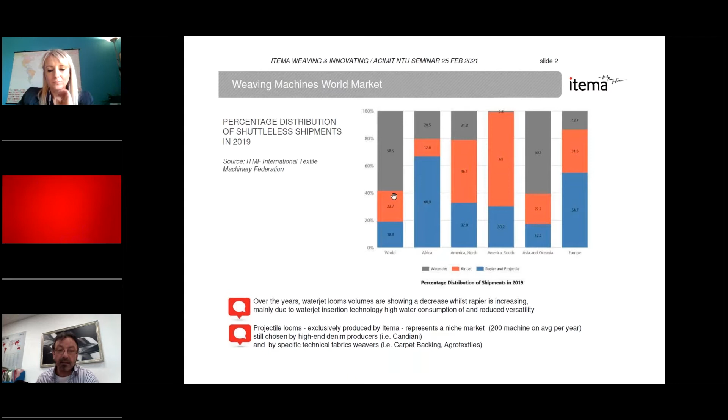Before going on, just let me give a short presentation of my company. Itema is a leading global provider of advanced weaving solutions, including weaving machines, of course, spare parts and integrated services. It was born from the merger and acquisition over the years of very important brands in the textile machinery industry, such as Sulzer Textil, Somet, Vamatex, and in the last year also Panter.

Itema has its global headquarters in northern Italy, Bergamo area, near the international airport. We have more than 900 employees worldwide and 2 production sites in Italy, 1 in Switzerland and 1 assembling line in China. Itema also has a worldwide presence with commercial, after-sales and training centers in Italy, Switzerland, China, India, Japan, USA, Hong Kong, and Dubai.

Okay, let's start. Our portfolio is rich because we are the only manufacturer in the world to provide the top 3 weft insertion technologies: rapier with both negative and positive transfer, airjet and projectile.

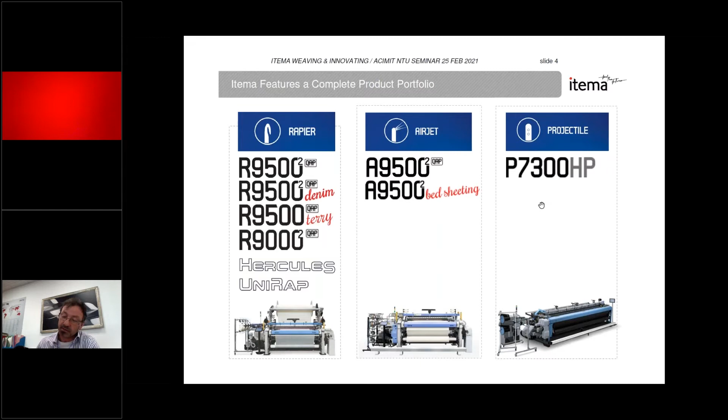Airjet weaving technology. With the airjet looms, it is possible to reach today speed performances that were unthinkable even only 6-7 years ago. We have customers who nowadays are able, with the new A9500 second generation air-jet loom, with cotton fabrics for clothing and apparel, to run at speeds of 1,280 and 1,320 picks per minute, 8,000 working hours per year. With fabrics made from synthetic yarns, such as linings, these speeds are even higher.

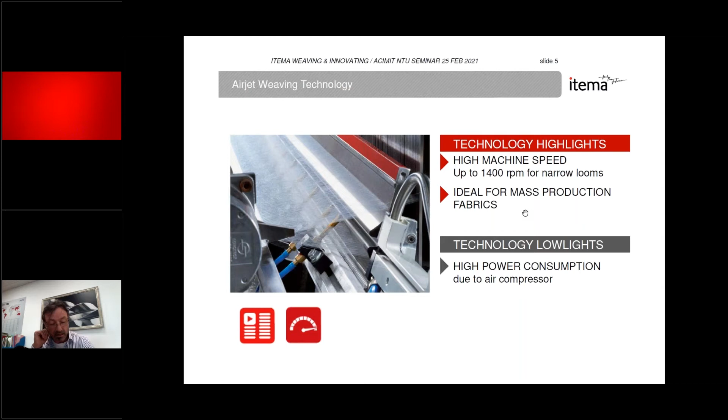The air-jet weaving machine is confirmed more and more competitive and winning, especially for the sectors of simple fabrics and mass production. Here we can see the segments where, in fact, the sector of gray fabrics, such as fabrics for background printing, apparel, bed sheeting, records the greatest preference for the air-jet. Next comes the denim sector and synthetic and shirting.

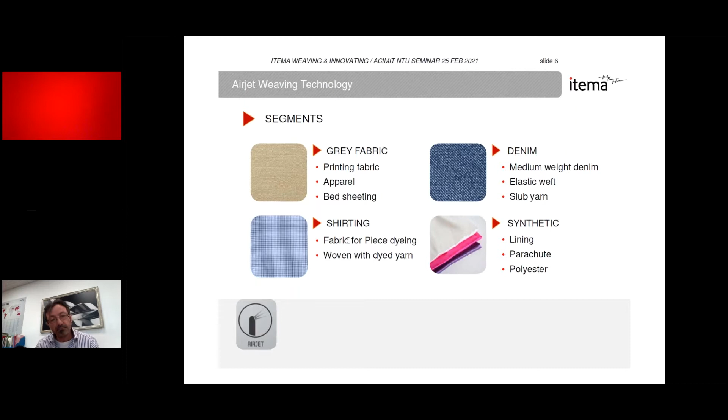Rapier weaving technology. Rapier looms are the most versatile looms ever. Virtually all orthogonal fabrics on the market can be woven with rapier technology. Thanks to sophisticated research on materials and innovations that we will explain in the next slides, our rapier looms have achieved truly remarkable performances, with customized solutions so as to satisfy any need of the weavers. But compared to the air-jet looms, due to the mechanics of the weft insertion system, rapier looms have a slightly higher spare part cost.

The segments are very, very large. Practically, as I said, there are no limits of orthogonal fabrics to be produced by rapier weaving technology, by the rapier looms.

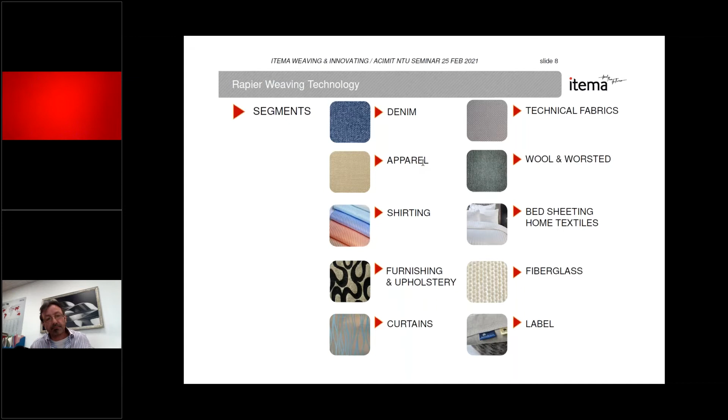The future of textile. The market of woven textile is getting more and more competitive. So listening to our customers, the three main points to focus on for the future of the weaving machine are, first, versatility. The weaving machine should be ready to weave different styles of fabrics, with the possibility to weave the widest range of weft yarns with a reduced machine setup time.

So versatility first. Second, digitalization and performance. Predictive maintenance, for instance, and big data collection are key points to provide the weavers with smart solutions able to guarantee cost savings and reduce the workload. Third, sustainability. To increase competitiveness, the weaving machines need to provide reduced consumption, both in terms of energy and fabric waste.

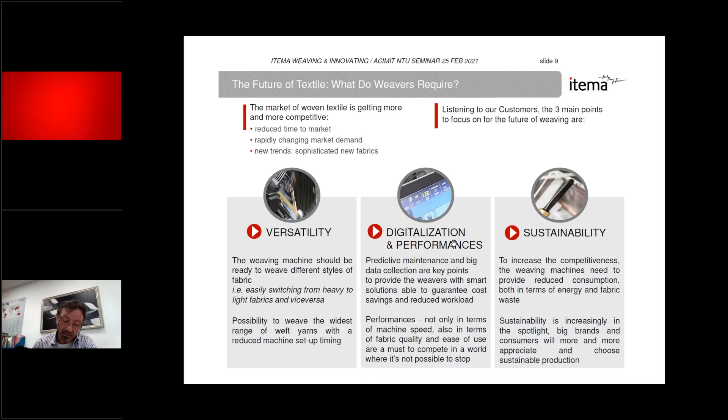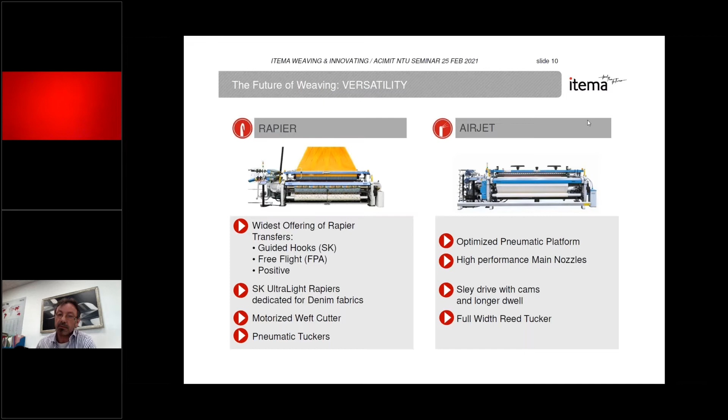So, versatility. Versatility for rapier looms means a wide range of weft insertion systems. For instance, with guide hooks, we call SK, with guide grippers, without guide hooks inside the shed. With guide hooks is to allow the highest weaving speed.

Specifically for the denim sector, we developed an ultralight version that, in addition to the very high weaving speed, allows the weaver to also set a very small shed angle, like no other reference. The shed angle is a very, very important condition for the quality of the weaving. With free flight rapiers, sorry.

Scusi, signor Ranza, scusi. I kindly ask all participants to mute the microphone, please. Thank you. Mute the microphone, please. Prego, signor Ranza. Okay.

So with the free flight rapiers, FPA, free flight rapiers, they are suggested in case of very delicate warp yarns, even filament zero twist, which cannot withstand the presence of guide hooks inside the shed. Then we also have positive rapiers, in order to really weave any type of weft yarn.

Then we also have a motorized weft cutter to better optimize the clamping and insertion efficiency of the weft, and also pneumatic tuckers with great ease of use and settings, a very user-friendly tucking system, significantly lower maintenance cost, and no problems of interference with the warp as the mechanical tucker system has.

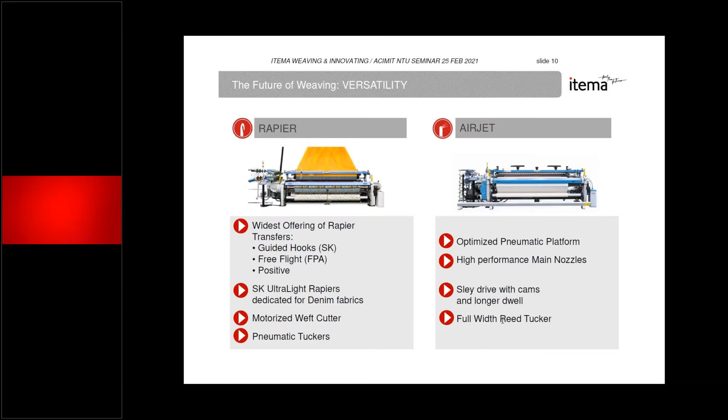For the Airjet, we have an optimized pneumatic platform. We will see later. Optimized pneumatic platform, high performance main nozzle, sley drive with cams, with longer dwell, and full width reed tuckers. Let's go deeper inside the Airjet. So the pneumatic platform is the base for the weft insertion on an Airjet machine.

The pneumatic platform must guarantee very high speed, respond very quickly, and above all, without large fluctuations in air pressure. For this reason, larger tanks have been designed in order to have maximum system responsiveness and stability. Furthermore, the tanks are positioned in special cavities here, to reduce as much as possible the vibration. Tanks.

So, as I told, the main tanks are inside the main frame of the loom in order to reduce vibrations as much as possible. And thanks to this, the pneumatic platform appears compact and at the same time more robust. All this guarantees optimal weft insertion cycle control, which is, I repeat, the main feature to be able to weave at very high speed. Here we can see the volume that we have increased in comparison with the last model of Airjet looms that we had. We introduced the model at the last ITMA in Barcelona in 2019.

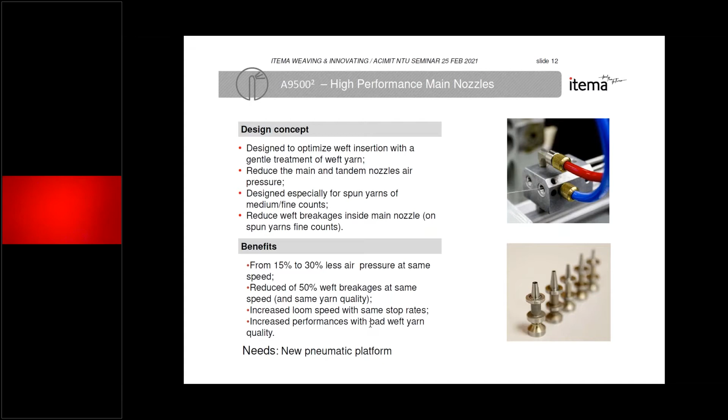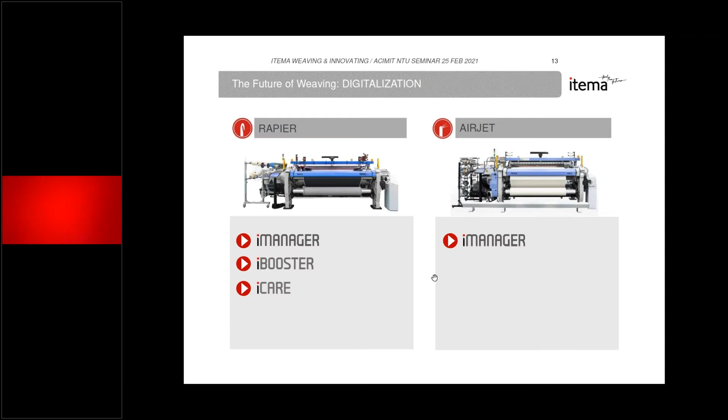So next, digitalization. For digitalization, we can offer at the moment electronic and digital solutions like iManager, iBooster, and iCare for rapier, and iManager for Airjet. iBooster. The iBooster package was introduced in the latest model of rapier loom, launched during the last ITMA in Barcelona.

iBooster is a package that literally boosts machine performance, thanks to a deep material study by our ITEMA lab in cooperation with Lamiflex. Lamiflex is a producer of composite materials like carbon composites and plastics. ITEMA developed new reinforced tapes, sprocket wheels, and micro smart coolers to ensure extended lifetime.

Part of iBooster is the iCare package. iCare monitors in real time the state of ITEMA tapes and sprocket wheels and suggests possible interventions. When it's time to replace these components, a pop-up menu appears on the machine console and helps a lot the technician of the weaver. It provides the advantage to fully control the machine operations, even when running at high speed. Maximum speed and maximum reliability at the same time.

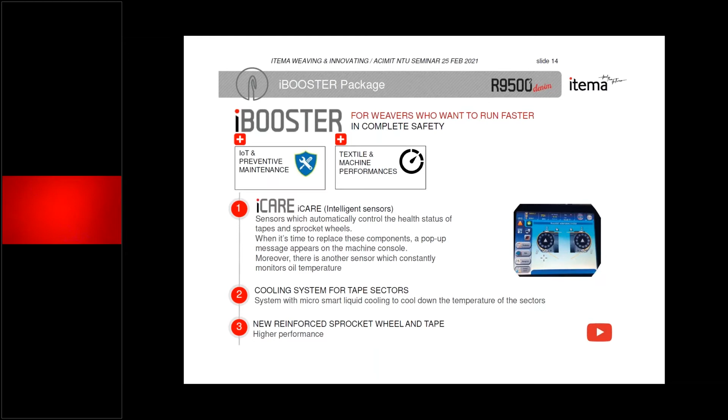Next, iManager. iManager is the ITEMA weaving managing system that brings on a laptop or desktop computer all the relevant data and information about the weaving machines. Thanks to iManager, it is possible to see in real time the actual status of the looms, the textile data, the settings, as well as to view and download machine statistics in several formats, giving also essential information about the operation of the weaving machines.

Moreover, by means of the textile CAD function, it is possible to open, create, modify, and save Dobby and color patterns, as well as to edit old file formats and to directly upload them on the loom. This is iManager for digitalization, an important tool for modern weaving.

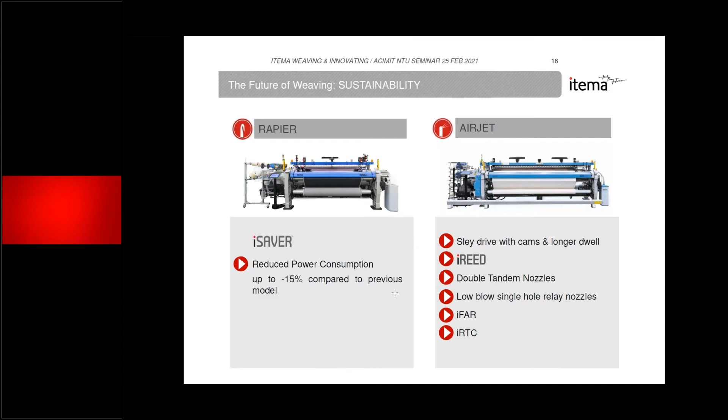Last but not least, sustainability. Nowadays, energy consumption is more and more important, not only for economic reasons, but also for ecological reasons as well. For Rapier, we introduced the iSaver, and for airjet, sley drive with cams, iReed, double tandem nozzle, low blow, single hole relay nozzle, iFAR, and iRTC. Let's see them more deeply. The iSaver.

Since ever, Rapier weaving implicates warp and weft waste formation at both fabric sides. iSaver is a new device that is able to completely eliminate the left-hand side waste selvage. Listen, left-hand side. So at the left-hand side, there is no waste at all. iSaver is based on the most advanced mechatronic principle, which provides weavers with an innovative, intuitive, and simple to operate device. Setup is directly from the machine console. It does not hinder the operating speed of the loom.

It is composed of a brushless motor for the horizontal movement of the clamps, these clamps, and a voice coil linear motor for the opening and the closing of the clamps that hold the weft. It is possible to have 4 clamps. It means 4 weft colors.

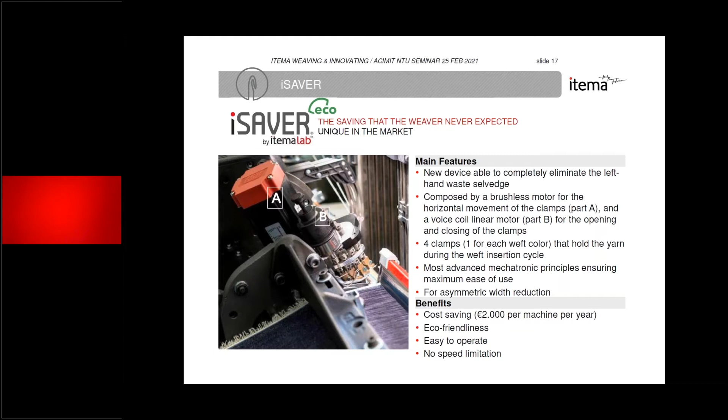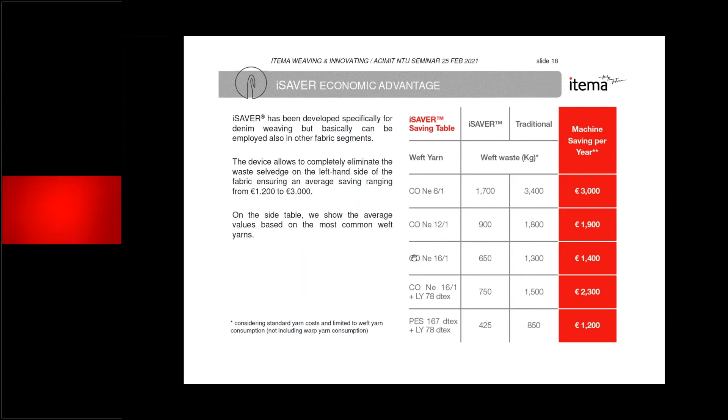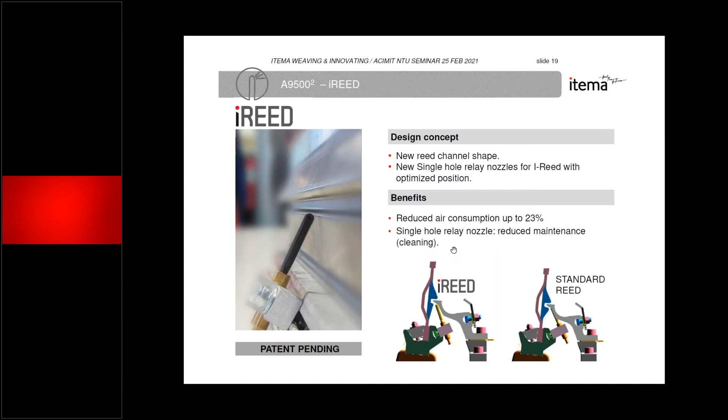Sustainability means also efficiency. A large percentage of the filling stops, so the weft stops, are handled by the machine itself. Air-jet can be not successful in weft insertion. It can happen that the weft does not reach the right-hand side of the loom correctly for various reasons. The weft does not break, but comes out of the reed tunnel. In these cases, the air-jet loom can restart automatically through the iFAR device, which eliminates and extracts the short weft from the shed. The weft extraction can be done pneumatically, and we call it FAR, or with the combined action of pneumatic and mechanical extraction, that we call iFAR.

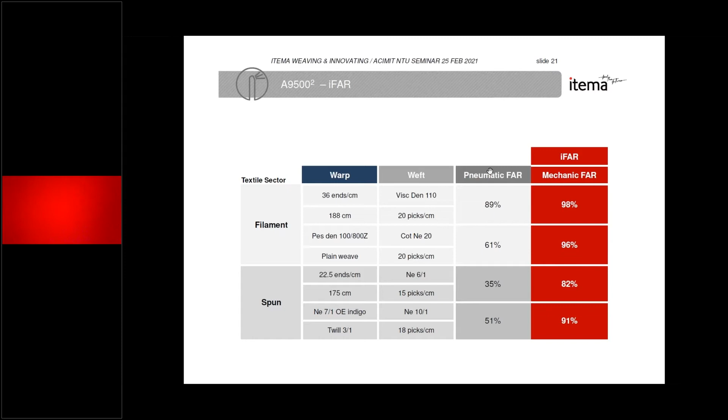In this diagram, you can see some comparison, because according to the sector and the type of fabric, we can suggest to use pneumatic FAR, that is simpler and cheaper, or the more complex iFAR system with mechanical and pneumatic action. For instance, for filament fabrics, we can suggest to go with the pneumatic FAR because the efficiency of extraction is very high. On the other hand, for spun fabrics, the heavier the fabric, the more is the necessity to have the mechanical system.

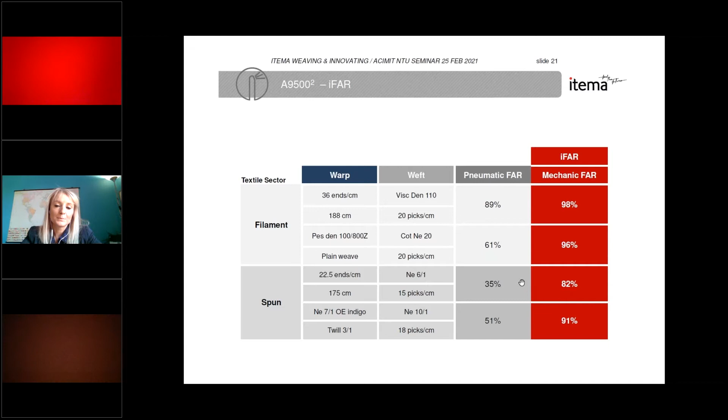One of the most important things that helps the efficiency in the air-jet loom is real-time control. As I said before, with the air-jet weaving machine, about 70% of total air consumption is consumed by the relay nozzles. The amount of air required depends on the opening time of the relay nozzles, and it is crucial to minimize the opening time of each relay nozzle valve.

With what? With this iRTC that helps to better follow the flight of the weft, and to reduce to a minimum the activation of that. So iRTC simplifies machine adjustments. For customers with little qualified personnel, it guarantees better performances and lower air consumption. We can say up to 20% less air consumption.

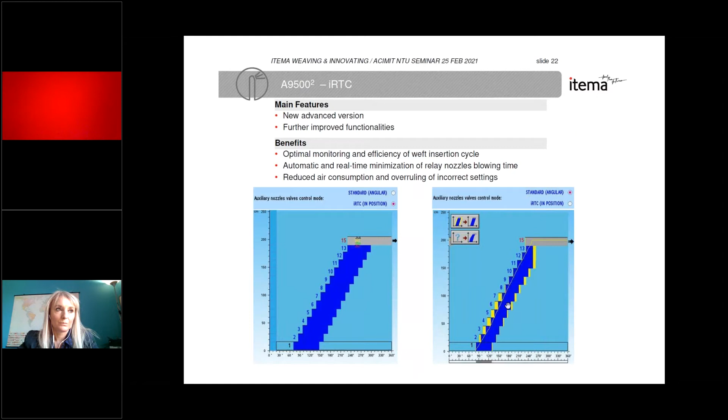For companies that have capable staff, anyway, it allows them to arrive in a shorter time at the optimum configuration, because it's completely automatic. Furthermore, iRTC will be able to benefit from better efficiency in weft insertion, because the system follows its flight better. This benefit is all the more evident the poorer the quality is.

The poorer the quality of the yarn, the longer the blow it needs in order to be able to follow every different type of flight. With the iRTC, no need. So we should have also better efficiency.

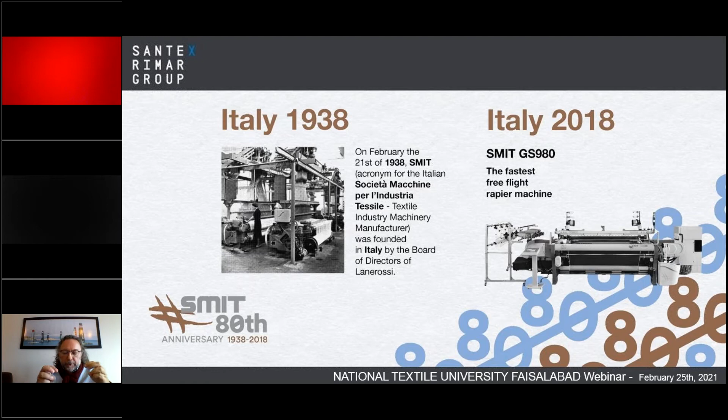It is 83 years old, and the group started in 1964 with Rimar, founded by Giannino Marzotto as a research and development department of the Marzotto Group. Today it is one of the leaders in Italy as a textile manufacturer. A heritage of six companies which have made the history of technology in textile and technical textile.

Here we have SMIT since 1938, the first rapier weaving machine in the world. You can see the long history of SMIT, changed over time, became Nuovo Pignone with the famous Fast, and then G6300, and then again the GS 900 series. The company joined Santex Rimar Group in 2016, and today it's part of this very good group.

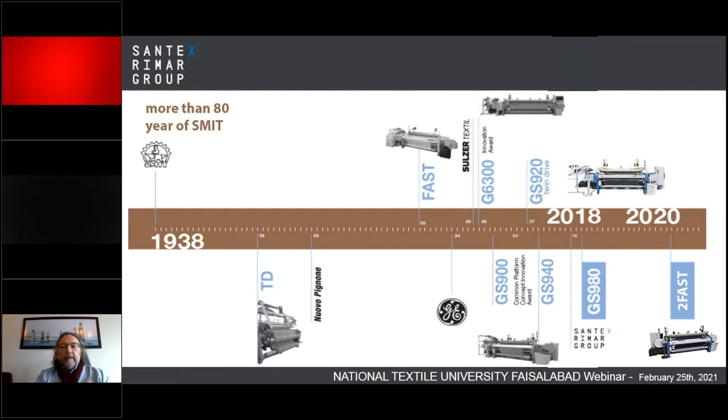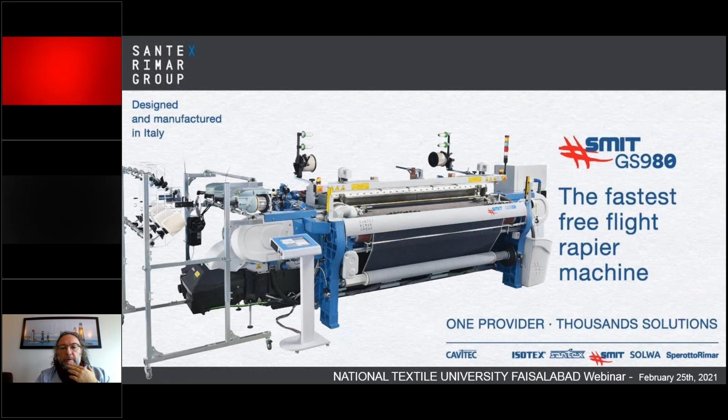This is one of the latest machines. We have the GS 980. 80 means 80 years of history of SMIT. It is our production in Italy, 100% Italian manufacturer, produced in Vicenza, and mostly used also in technical textile.

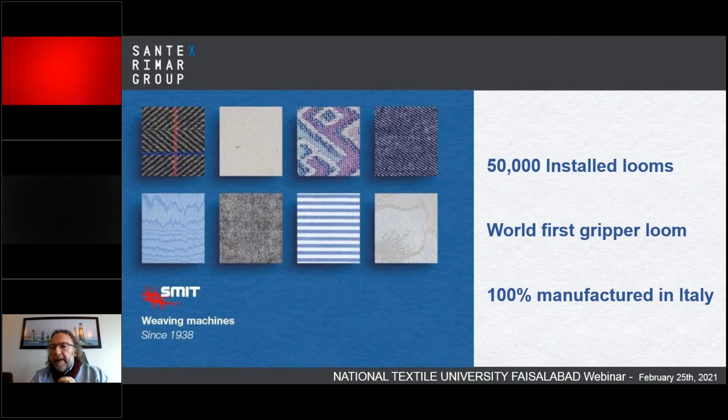Here we have 50,000 machines installed worldwide. It is the first gripper loom in the world, and as I told you, is 100% manufactured in Italy. Performance is very, very important. As you know, the speed is very high, considered as a free flight machine, and insertion up to 1,650 meters per minute with a speed of over 700.

Versatility, big versatility in terms of yarn count and type of yarn: cotton, spun yarn, polyester, carbon fiber, glass fiber. And one of the main characteristics of this machine is it's a free flight machine. It's totally free flight and it guarantees high quality in the final fabric.

The drive, we have a spherical crank driving mechanism. This guarantees a movement of the sley and the gripper that is very smooth, and this allows us to work with free flight in a wide loom, 380 is our maximum, with very high efficiency and high performance.

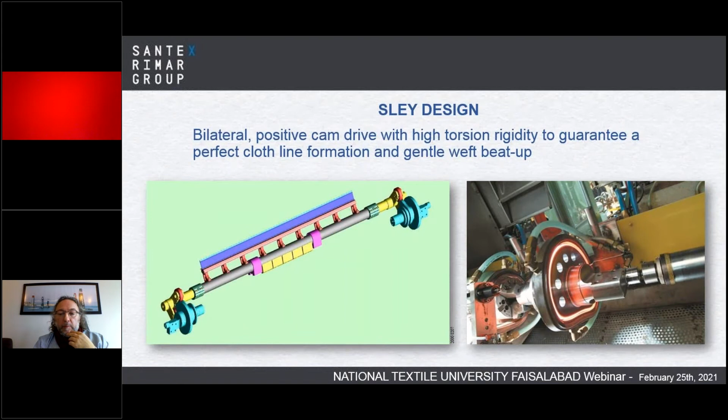Sley design, bilateral positive cam drive with high torsional rigidity to guarantee the perfect cloth line formation without any mark and defect on the fabric. Quality at the end of the fabric is very, very important.

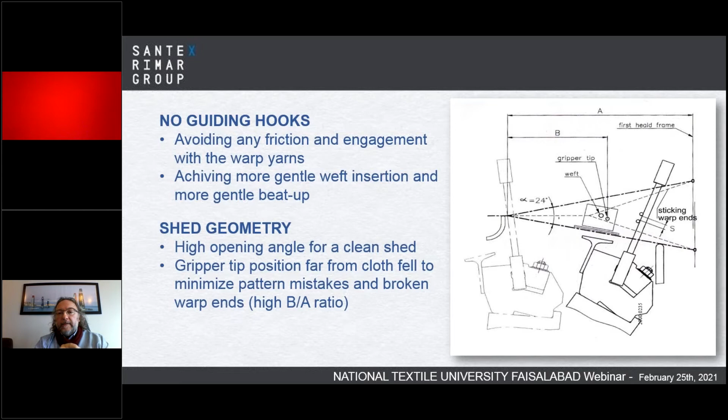As I told you, it is free flight, so it means there are no guiding hooks. This helps us to avoid any friction with the warp yarn, and this helps us to achieve more gentle weft insertion and more gentle beat up. High opening angle for a clean shed, so no friction of the gripper with the warp yarn, and this helps us to have practically a very low rate of broken warp ends and high quality of the fabric at the end.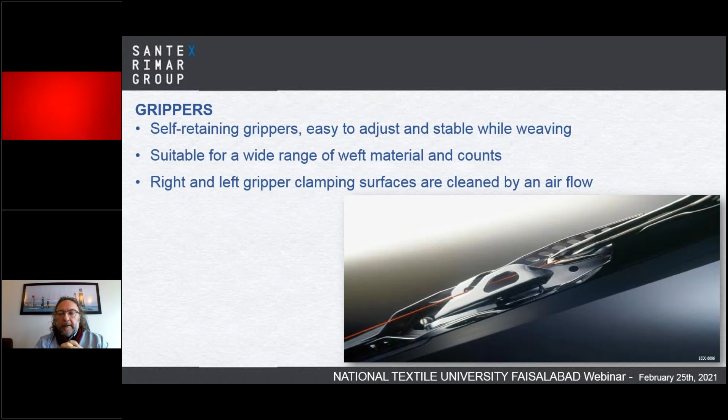Grippers are specially designed from Smit in order to work at very high speed in free flight. New direct drive allows practically to move the loom at any speed, any range of speed, just with the control from the console. So reach high performance with less vibration and noise.

High efficiency in transfer for the shed motion. Dobby control from our console. Energy saving. This is very, very important today. The attention for sustainability, for the control of the energy consumption is very, very important.

Last but not least is the high torque and no vibration, high acceleration, in order to guarantee, from the first beat of the weft insertion, the same torque, the same power, in order to avoid any start mark when we have a stop of the production.

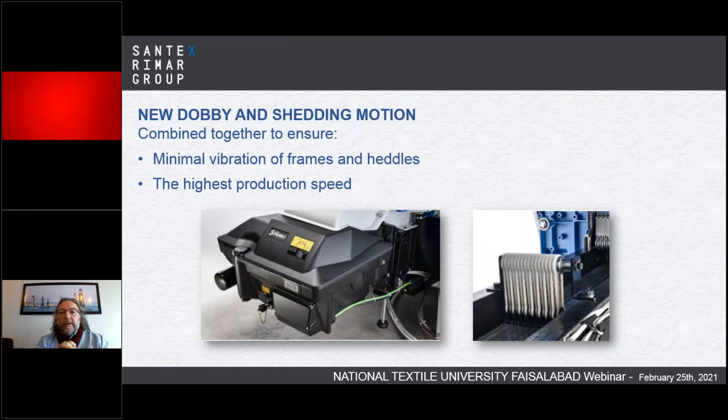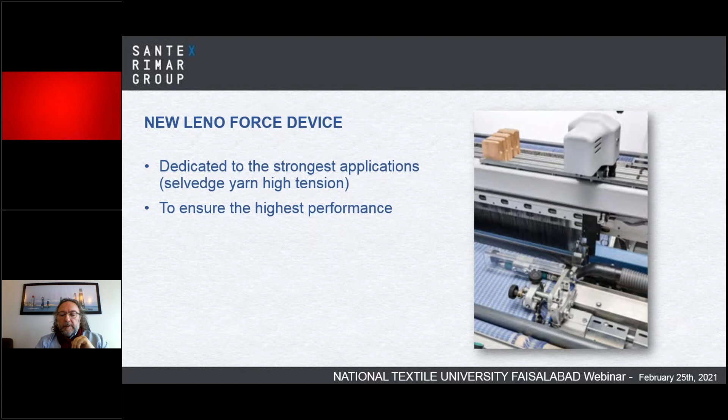New Dobby, we are using the main Dobby in the market, Stäubli. Stäubli is the leader today in Dobby production. We are using the version 3020 and 3060 according to the width and the speed of the machine. New Leno Force for the leno formation. We have the new system to control the high tension and high torque for the leno. We also have the tucking device in case.

New E-cut, this is very important in the case of using the wide range of weft, like my colleague and competitor, but friend Claudio was mentioning. The wide range of weft yarn used on the loom needs, in some cases, different timing of weft cutting, and in this case we are using our E-cut.

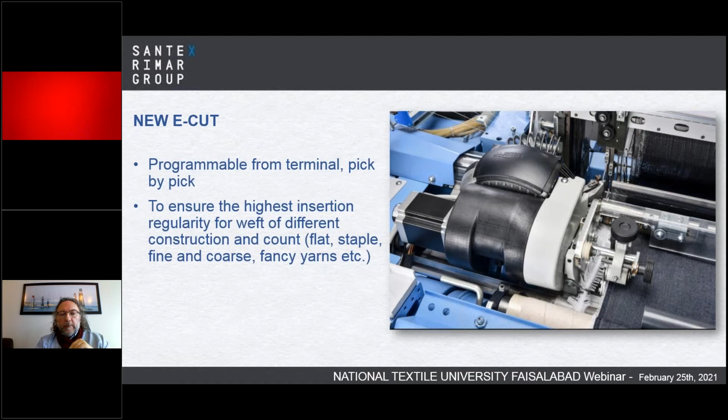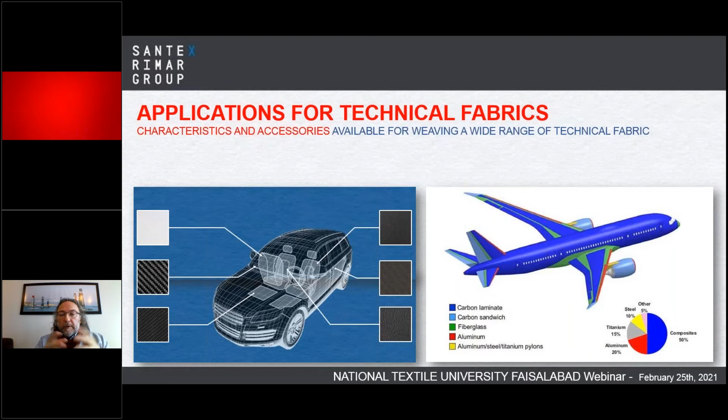Today, in the new 787, in the fuselage, in the wing skin, in wing flaps, vertical and horizontal stabilizer, a big quantity of composite material and aluminium is used, mostly produced practically on our looms, on weaving machinery.

So here we have indicated some of the most important parts we need to care about, especially when we are talking about technical solutions. As you see, for example, in airbag, it's important to have reinforced let-off unit, reinforced take-up unit, like warp deviation, according to the kind of technical fabric we go to produce.

We have different points, different items to care about and to improve in some cases in terms of rigidity, in terms of sturdiness and capability in order to reach high performance and a high level of quality of the final fabric.

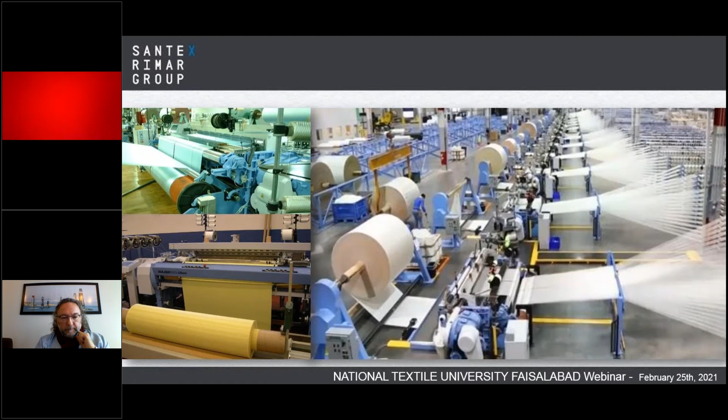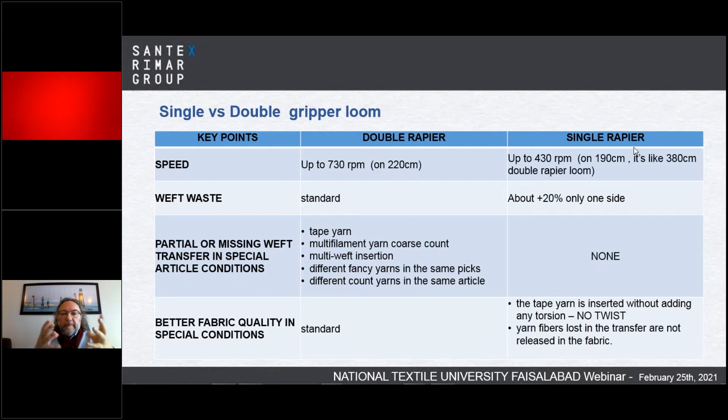Sorry, we go ahead because I cannot see this.

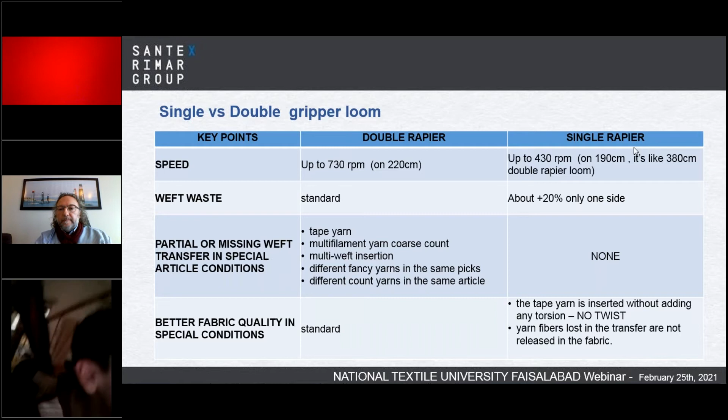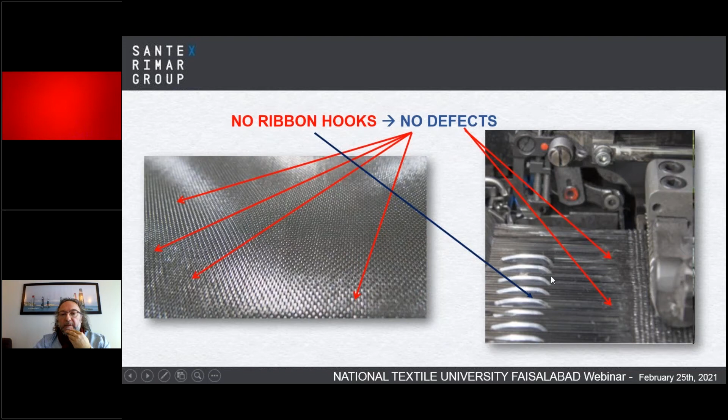No ribbon hooks, what I was saying before, is a free flight. Practically, in many cases, especially in a technical fabric, it's very important not to have any hooks because in case of hooks, we may have defects mainly in the warp, as you may see in this slide.

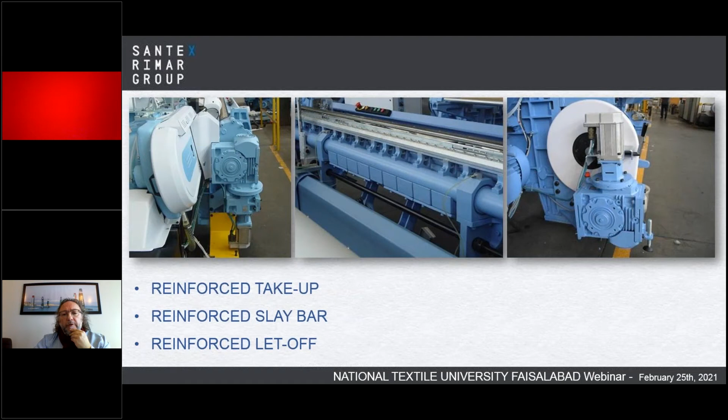Some details, as I mentioned before, in the slide before, are the reinforced take-up, as you see on the left, reinforced slay bar, and reinforced let-off. These are very, very important in case we are using, for example, glass fiber, carbon fiber, all those special versions necessary in a technical textile solution.

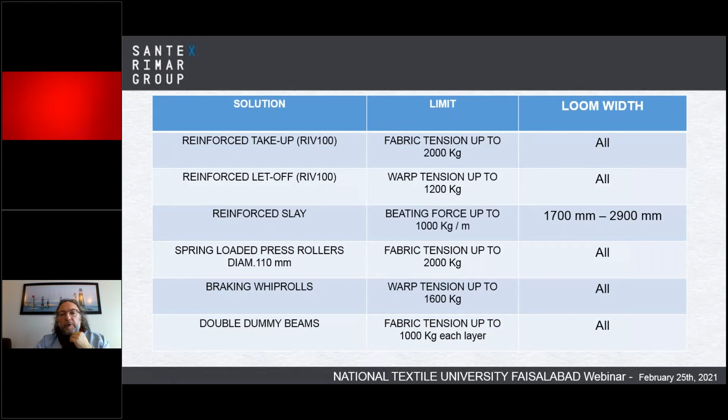So here you can see some characteristics. So reinforced take-up with a tension up to 2,000 kilograms, reinforced let-off, reinforced slay. These are all the characteristics we are using on our machine in order to reach high performance and high quality in production of technical fabric.

Here, press roller also; these are special components used on our machine in case of technical fabric. Of course, the take-up roller and the press roller need to be adapted to the different solutions and different needs of fabric production. In case we are producing again carbon fiber or glass fiber or steel, we may have different needs in terms of take-up and press roller.

Here we also have the back side of the machine, the same issue. I mean, the warp deviation roller and the braking whip roll can be single, double, dummy beam, and other different solutions which we have on our machine in order to produce practically any kind of technical fabric.

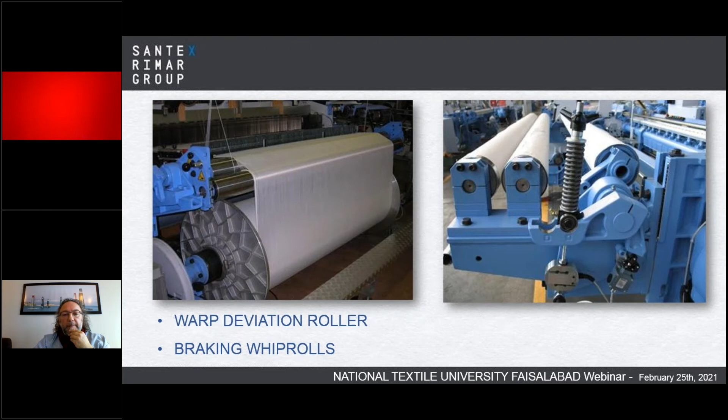Here we have exactly what I just mentioned, the dummy beam, single beam, single dummy beam, double dummy beam, or calendar in case of special processes for weaving, like double layer, etc. This we have mainly in fiberglass, for example.

Some solutions like airbag. So the importance of, as I said before, some items like reinforced let-off unit, reinforced take-up unit, deviation roller, full width temple, and optical sensor, false selvage warp stop motion. All these are very important in order to produce high quality fabric for airbag.

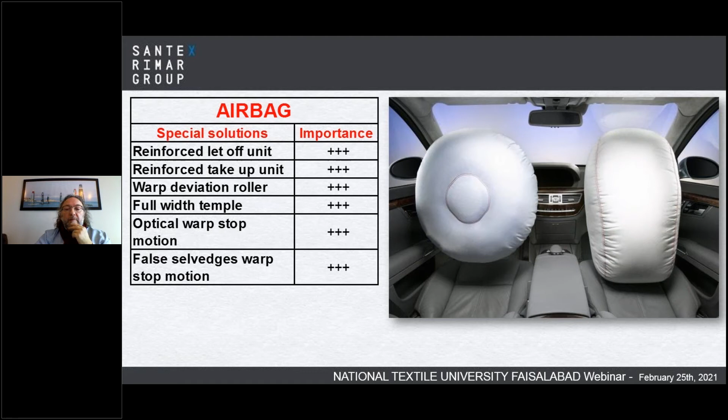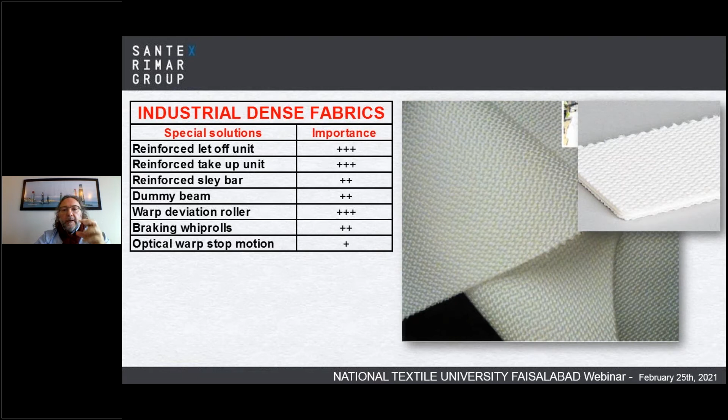Same issue for industrial fabric in very high density. So in each production there are some special or determined items which need to be particularly reinforced or built in according to the needs. Conveyor belt, for example.

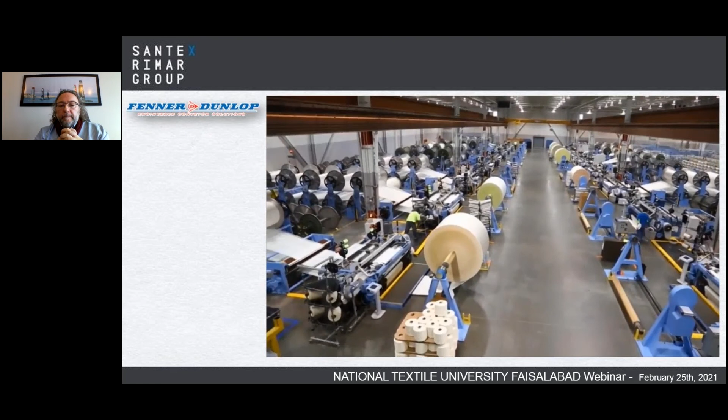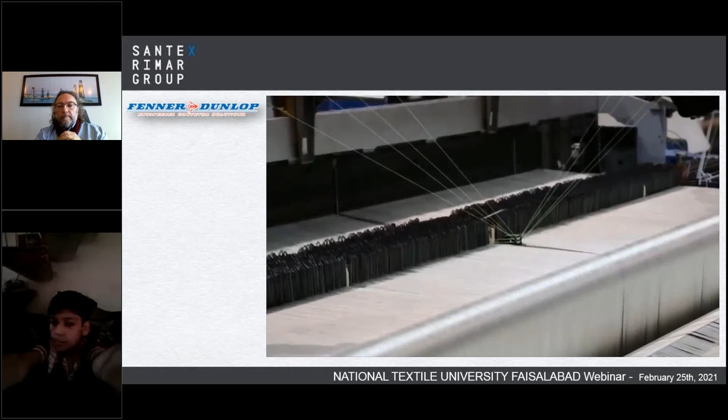Here is one of our customers in the United States, Fenner. Produces the highest quality belts available. Our belts are in operation in the most demanding conditions, supporting a vast range of industries. This is a beam fabric. That is normally our heavier weight fabric. Those fabrics are made to length for strength and modulus of the conveyor belt. Load support, impact resistance, and safety are all state-of-the-art modern facilities, a landmark of achievement in the industrial textile industry. With a combination of research, testing, and production, our efficient operation is a model of productivity while always focusing.

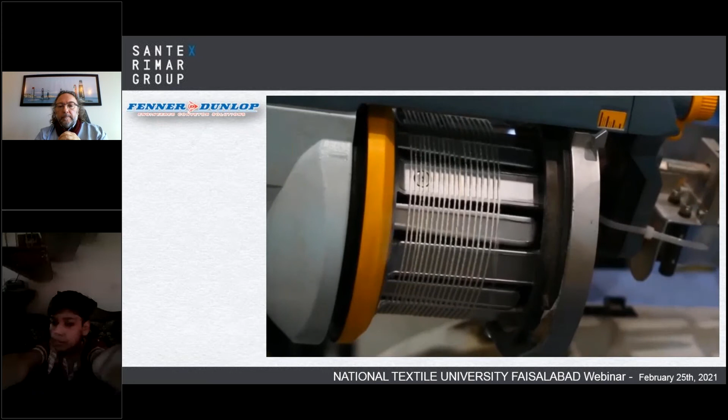Okay, what you saw was the video of our customer in the United States, Fenner, as you see, with a very big factory producing conveyor belts with fiberglass.

Here we have also, again, other products, coated fabric and tarpaulin. This process is also carried out by machine producers in our group, in the Santex team, like Cavitec and Santex, for finishing and coating, laminating, etc.

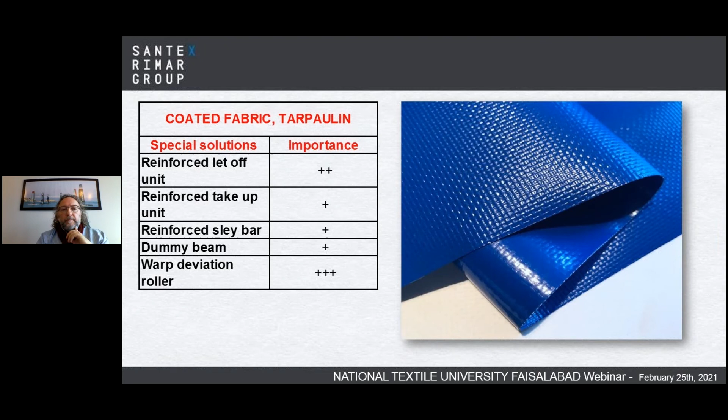As I said before, also steel wire fabric is possible to produce on our machine. Again, we have some items and some accessories which need to be specialized in order to reach a high quality product.

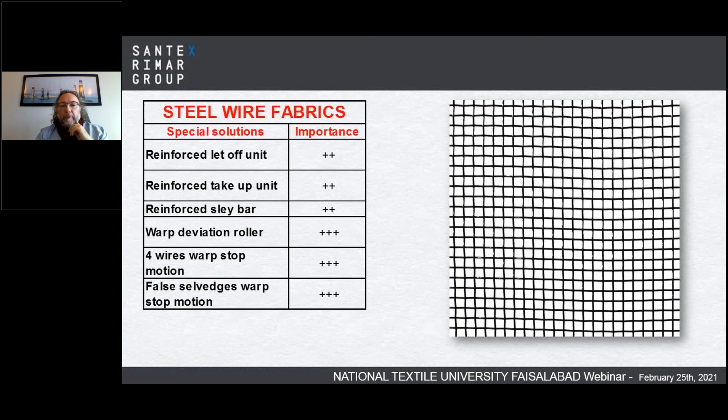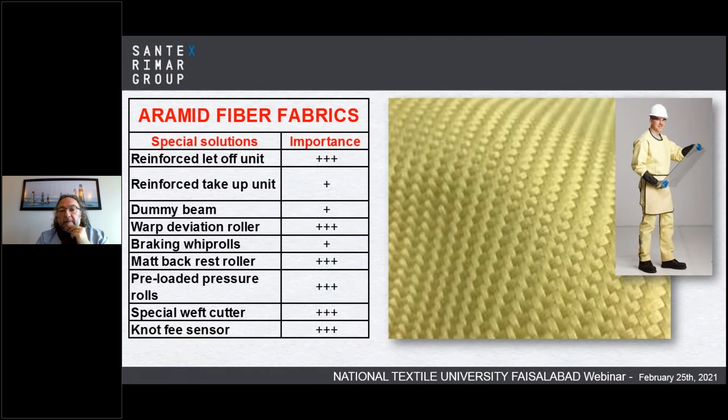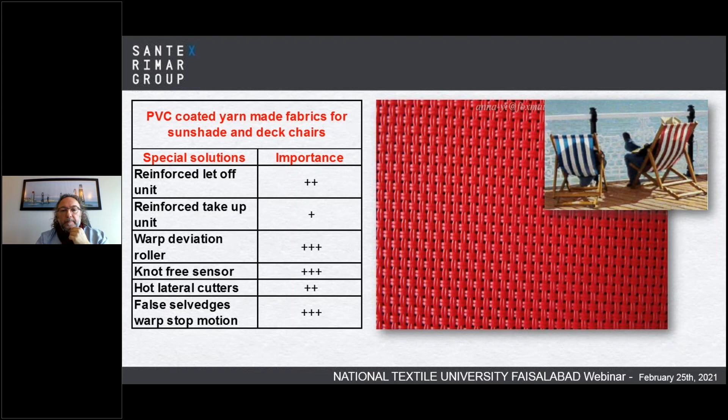Glass fiber, as I told you before, and as we just saw in the video, and aramid fabric, PVC coated. All these are types of fabric and yarn which can be produced on a Smit machine. Glass fiber, carbon fiber.

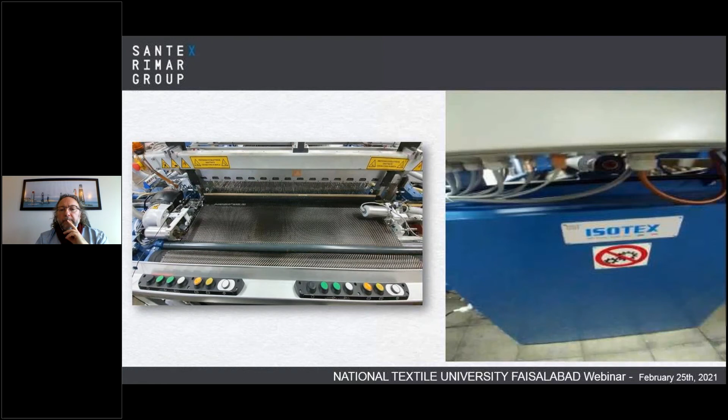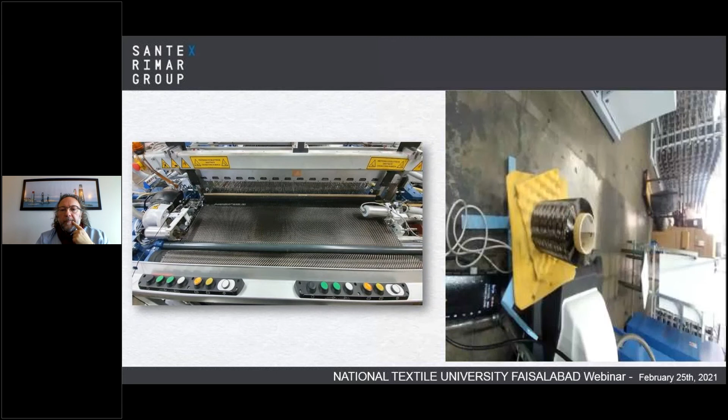I'm afraid that the video was not very successful, it was going very bad, but I'm very sorry for the connection. Most probably it is a problem.

This is our very quick presentation to give an idea about the capability in technical textile production of Smit machine. We are here ready to help you for any kind of needs and whatever request or question you may have for our production.

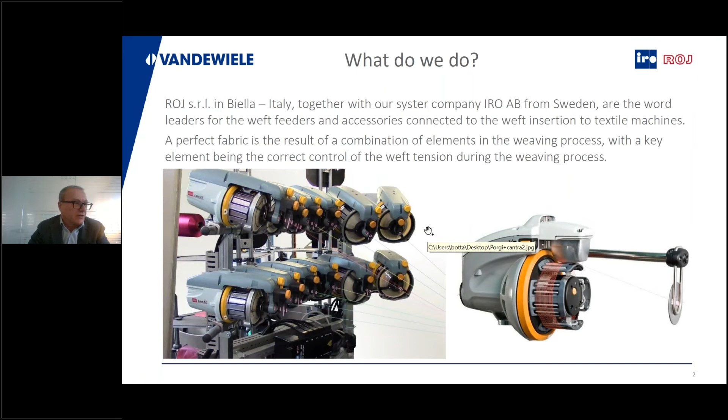Also, as information, the company ROJ belongs to a larger group named Vandewiele, which is a Belgian company, probably known on your side, that makes carpet machines. So it's also making looms. And inside this big group, there are different companies, all textile related. So you see some names there like Bonas and some others.

Talking about weft insertion for the looms, the basic function, I'm sure that you're familiar, is to take the weft from the bobbins, prepare it and insert it into the machines. But it's not only like that. That is still the main function, but it's very difficult to do it in a proper way for the type of machines, advanced technology that you have seen in the other presentation. The speed is going higher and higher. The demand of quality in the fabric is going higher and higher. So we are an important partner in this process to guarantee that the final result in the fabric is what the customers are looking for.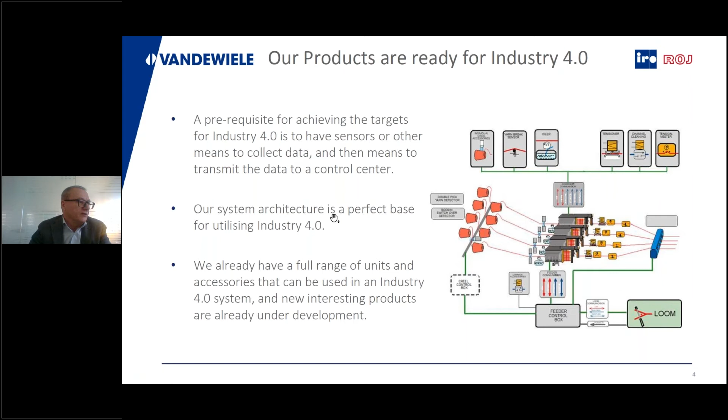And this is why we present our product not just as a simple item to be put on the side of the machine, but as a concept. It's a concept for several different accessories or parts working integrated with the main feeder to achieve all the different functionalities. And it's important to say that our latest products are all preset for what we call digitalization, which means communication between different parts on the feeder side and also with the looms. So we are fully prepared to achieve the requirements for Industry 4.0, which is getting more and more important for all the new applications.

Talking about important functionalities, as I said before, the feeder looks like a motor that is pulling the yarn from the bobbins and inserting it into the machine. But for example, the speed of the feeder is also very important, because the unwinding speed from the bobbin has to be synchronized with the weaving speed of the machine, depending on the weft pattern. Of course, the speed can be different for different colors, because it depends on the pattern, if it's working with stripes, if it's working weft mixing, and there are many different applications.

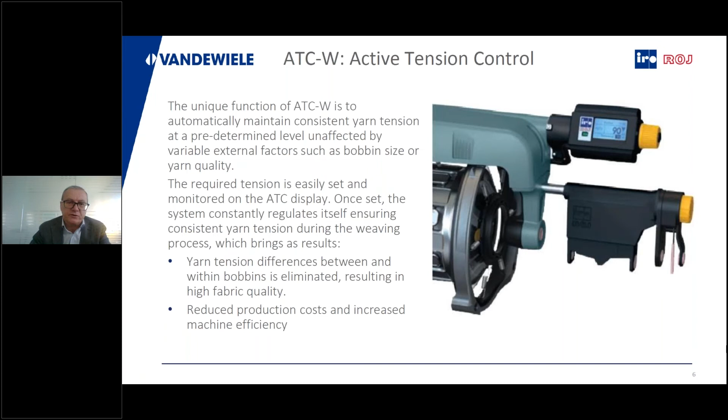If there is a variation at the bobbin change, or between different batches of yarns, or different working conditions, we can see if there is any difference in the tension coming from different bobbins, and we can equalize it and adjust our system so that what is going to the machine remains constant, which is very important.

The tension level changes at the bobbin change. This cannot be avoided; it's a typical characteristic of the yarn. And so you will see that the tension level is decreasing, and then when the bobbin changes to the next one, it can rapidly increase again. And this variation in the tension can create weft stops in this period of weaving.

Then we need to add some tension. We can automatically move the brake, so the brake will add the tension that is lost from the bobbin. And then when the tension from the bobbin increases again, we can again very rapidly relieve the tension from the feeder, with the result, as I said before, that the average tension remains constant.

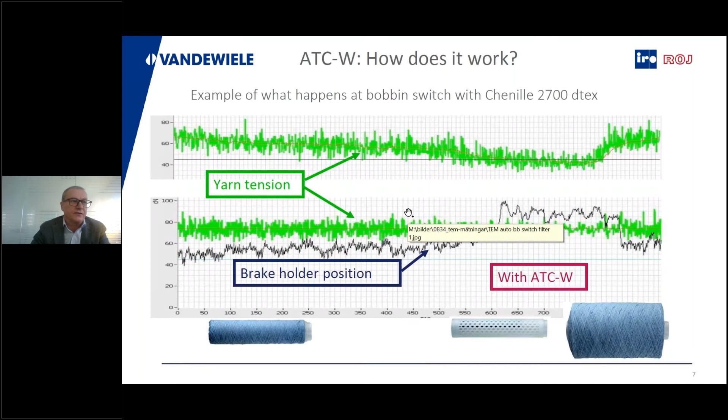Then we have many other accessories, electronic devices that are very important to be integrated with the feeders. We have electronically controlled brakes that can even control the tension level between each pick, which is called the TEC tensioner. So you can set the tension level in different zones within each insertion cycle. You can brake more at the beginning, for example, less in the middle, and then brake more again at the transfer point for the grippers, and so on. So you can adjust it by zones.

Then we have a bobbin switch sensor, which is a simple device, but very useful and very reliable, to give a signal when the bobbin changes. In the case of rapier, it can grant a faster reaction, as in the system I described before, to keep the yarn tension constant.

That is also a very accurate device to give the correct amount of oil if it is needed for some types of applications. Most important is to give only the oil that is necessary to grant a better weft insertion, without any waste and without any additional oil that can interfere with the quality of the fabric. With that device, you can perfectly control the amount of oil that you want to give to the yarn.

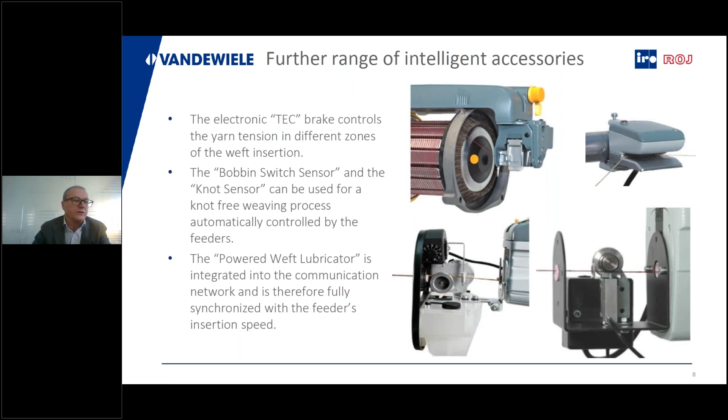Then we also have knot sensors that can be used to detect knots, as I said. So in combination with the looms, automatic knot removal can also be decided, so that the knot will not go inside the fabric.

Another important point of this latest generation of feeders is, as I said before, our products are fully digital at the latest technological level, and also very much user-friendly. We have now given the possibility with a very simple device, which is a Wi-Fi access point, point-to-point Wi-Fi, so not connected to internet, but you can connect your mobile phones, your laptop, with this access point directly to the feeder, which means that with your mobile phone, you can see exactly how the feeder is working, all the different data, the running condition.

And for some advanced application, you can also change some parameters or do some fine tuning for some special application that we will see later, especially for technical textiles. This is also very important for troubleshooting and maintenance. This is a device that all the weavers and the mechanical shops working with our product like very much. So very easy to use it.

And I mentioned a little bit about technical textiles. Also, from our point of view, it's a growing sector with a small percent, but it's growing. And the fact is, though, that it is difficult to achieve the different targets and the different challenges in this sector. So we are working together with the loom makers to give special functionalities on our feeders to support and find a specific solution for different type of yarns that are used in this sector. Some of them were mentioned before: glass fiber, carbon fiber, Kevlar, polyester, polypropylene, so different type of yarns that require maybe a different treatment than standard, to be able to be inserted in a proper way to this type of looms.

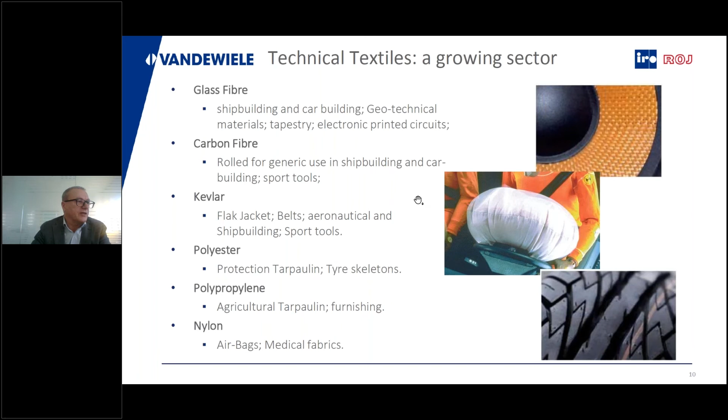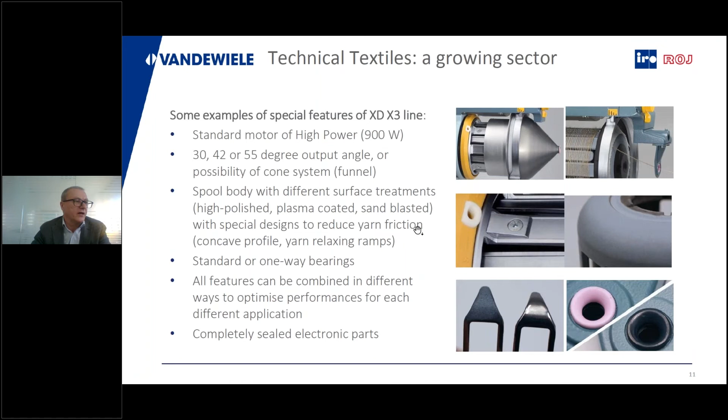That's why we have special lines of feeders we call the XD line, which is exclusive duty, or HD line, which is heavy duty. All these lines are very special, basically tailor-made for each customer, depending on the application, with different technical solutions. Can be either mechanical, can be either software control. It depends, like I said, on the application. You see some pictures, but it's not all that we have. We can make very different combinations of different surface materials. Anything that is in contact with the yarn in our feeders can be adjusted depending on the need. That is a very important message, because we are basically the only suppliers giving these possibilities.

Then talking about air-jet looms that were also mentioned today, this is of course also an important sector, especially also in Pakistan, in your area. You have seen before very interesting things regarding the latest technology for air-jet looms. I can show here what we did from our side. Also, air-jet looms need a feeder, of course, to pull the yarn from the bobbin and prepare it for the insertion. And furthermore, on the air-jet we also have to measure the length of the insertion. So each pick, each insertion length is measured by the feeder. And then we stop the yarn at the correct time at the end of the insertion so that the machine has the correct length, so it can be cut, woven, and then go to the next pick.

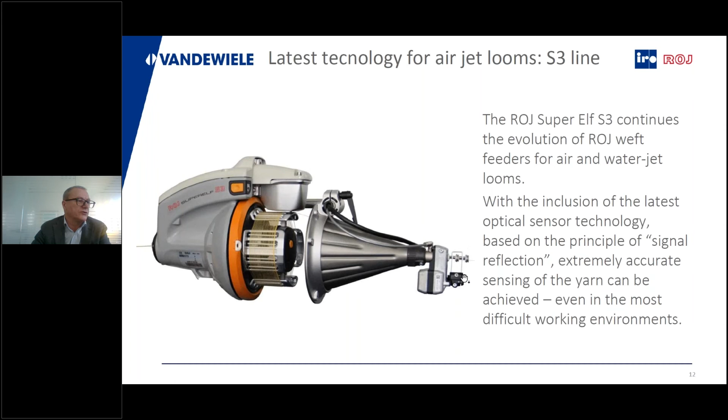The feeder that you see here in this picture is the latest generation called S3. And one of the main features also for air-jet looms is this brake here at the end of the insertion. We call it pulsar. I can give you brief information here. I'm sure you're familiar, but it's very, very important. Without that device at the end of the feeder, the machine will probably not work, or not with the speed that was mentioned before. Because also on air-jet, it's important to compensate the arrival of the yarn, because the yarn is stopped at the end of the insertion, and at such a high speed, this tension peak that is created when the yarn is suddenly stopped by the feeder has to be compensated somehow.

So we can compensate with a pulsar brake. It works like a shock absorber, like in your car. We can reduce the tension peak by minimum 40%, but in most cases more than half, which means that when the yarn arrives at the end of the insertion and is blocked, it will not break. Otherwise, without using this type of device, the yarn will probably simply break and fly apart, so the machine will stop.

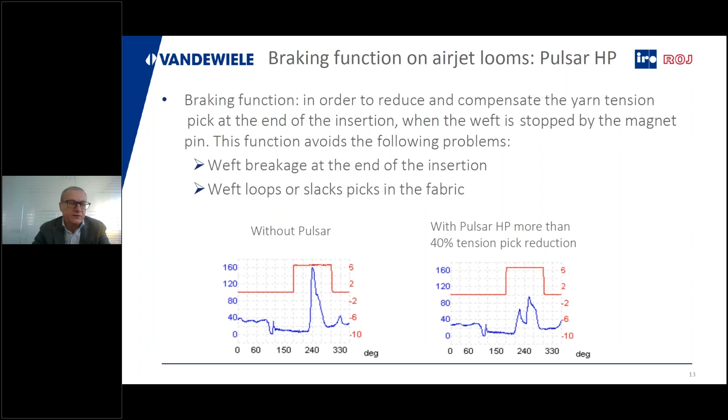Then, simple information to mention quickly to close this presentation is also that we are very active and important in the sector of retrofitting older machines. Of course, we are working with the loom makers for the new machines and to give the new technology for the latest loom, but we can also offer good packages to retrofit existing machines on the market.

You see here a couple of products like Chrono X3 and Stella G2 that can be used. They can work on any type of rapier or projectile looms, bringing basically the latest technology to a certain extent also for this type of machines. We have Super Elf G2, which is also for air-jet looms, and is our masterpiece for retrofit, and is also used on some of the new machines.

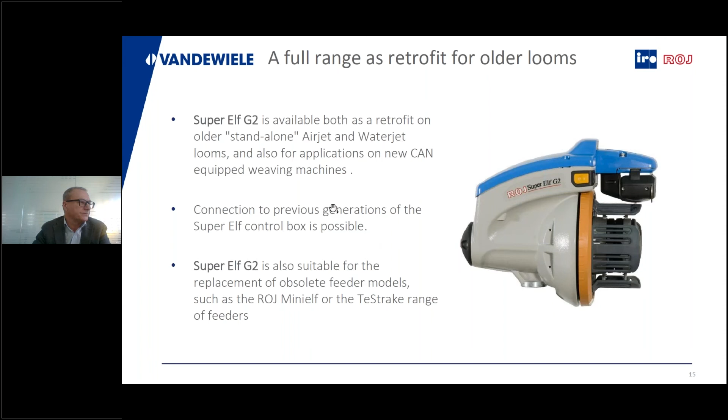Then I can mention briefly, just to conclude, that as I said, we are experts in tension control. So if we stay on older machines, when there is no possibility to communicate with the loom because of older generations, then we can still guarantee to control the tension with passive tensioners, like the example here in this picture, which is called UniBrake, and we said it is revolutionary, which is basically true, because I think all of you know traditional leaf tensioners to give tension to the yarn.

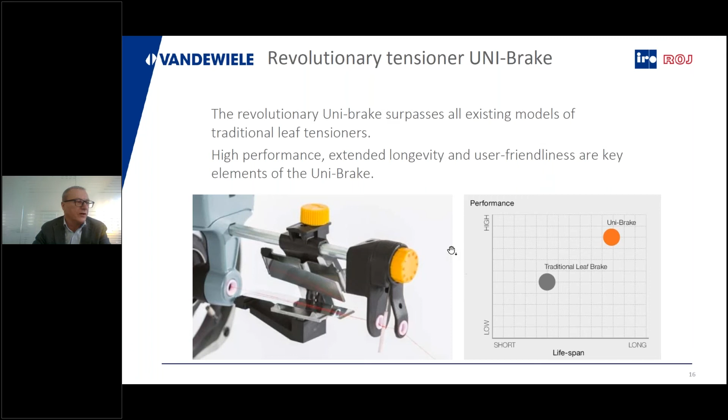This is the latest version and generation that is self-cleaning, and you see in the graphic, it can give much higher performance and a much longer lifetime compared to traditional leaf tensioners. Last slide is a message regarding Lurex yarn, or in general small flat ribbon yarns that can be woven on all machines we said before.

This is not a zero twist device, but we call it low twist, which means that normally these Lurex or small ribbon yarns are in small bobbins that can be inserted here on the feeder instead of the normal, what we call, spool body that takes the yarn from the bobbins. In this case, the bobbin is inside the feeder, so the small Lurex package, and then goes through this sensor and then goes to the loom, to the machine.

So this sensor can see the speed of the Lurex, immediately detect it and adjust the unwinding speed. So we will unwind the yarn by rotating the bobbin. And in this way, like I said, it's not a zero twist device, but we can reduce a lot the twist of the Lurex when it's inserted in the machine. And this is a very specific product that is available only at ROJ, and has been quite successful in the market where there is high use of Lurex yarns in the fabrics.

So as I said, I tried to be quick, but to give some important messages and information regarding the weft insertion. I hope it was interesting, and if there is any additional question, I'm here available. Thank you. Thank you, Mr. Botta.

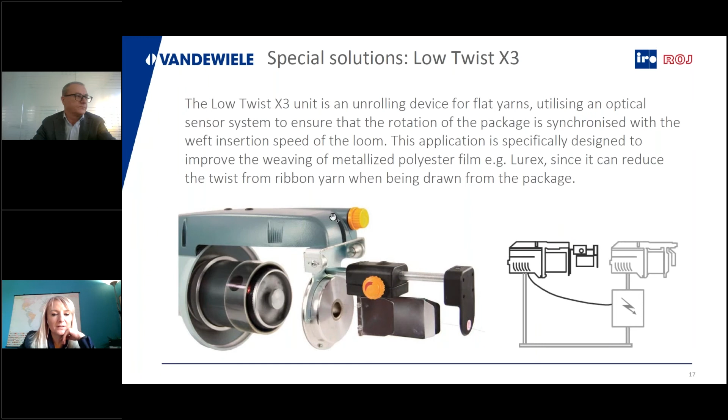So we don't have any more presentations, but if there are questions to the speakers of this morning, you can ask them now. We have more or less 10 minutes to answer your questions. Don't be shy. Can I have one, please? Sorry? Can I have one, please?

This is Dr. Talha Hamdani. First of all, I would like to thank all the speakers and the host for such an excellent presentation. And I'm very happy to know that Italian companies related to weaving machine manufacturing are capable and ready to adapt to the changing and challenging circumstances of weaving technical fabrics or high performance fabrics.

I have a very quick question regarding the price competition, especially in comparison to the Japanese machines. Further, is there any feasibility report already available for buying and installation of Italian weaving machines? Thank you. Do you want to send this question to the weaving machine producers?